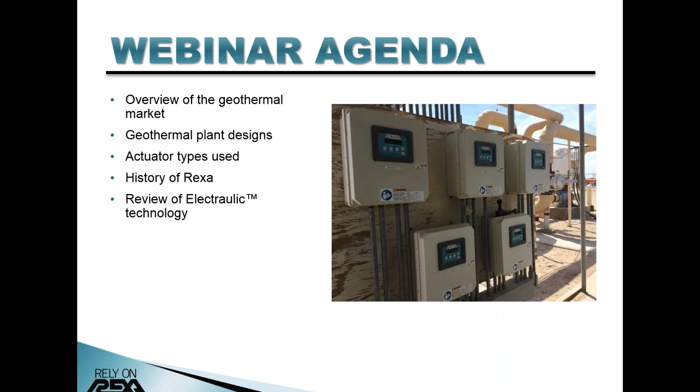A review of our technology. We'll look at the inner workings of the REXA actuator and what makes us the most unique technology on the market.

Some background on governor control valves. Turbine OEMs provide similar control valve equipment and arrangements with new installations. We'll discuss a typical setup with Joe Havorka.

Performance requirements. In order for a plant to operate as efficiently and economically as possible, it's important that governor valves perform to a very high level. We'll talk with Joe on this subject and get his input on performance.

System benefits. When MD&A upgrades older turbine controls with new electronic equipment and REXA actuation, there are many system benefits. Joe will share some of these with us from a plant perspective.

And finally, we'll wrap up the webinar with some takeaways and answer a few questions.

So for those attending and hearing about geothermal power for the first time, let's define just what it is. Geothermal power is a form of clean, renewable energy that taps into underground thermal reservoirs fed by rainwater and snowmelt and heated by the Earth's core.

These reservoirs are essentially limitless, though specific wells can be depleted in time. After the heat energy is used in the plant, the leftover fluids are re-injected back into the underground reservoir to recharge it for future use.

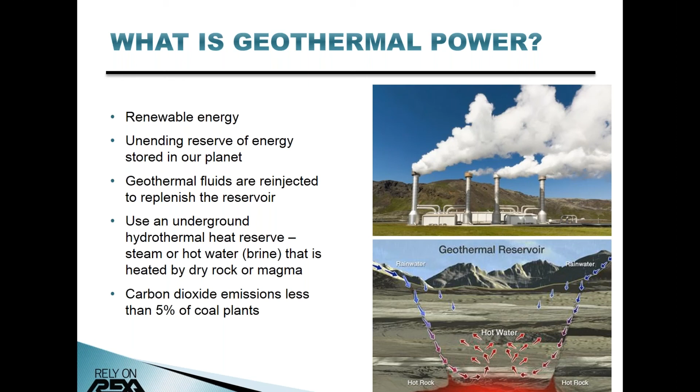Greenhouse gas emissions from the plant are negligible and meet all EPA standards, with CO2 at about 5% of a coal-fired plant.

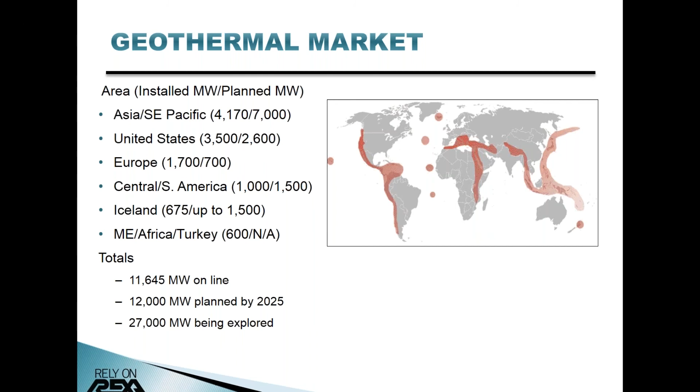Though geothermal power is less than 1% of all power generated worldwide, it is expected to double in the next 7 to 8 years, and then double again based on current exploration levels. It is one of the more expensive renewable energy sources to locate and extract from the ground, but once found, it's non-polluting and can rejuvenate itself. The growth areas are for the most part an expansion of existing plant locations.

Leading the pack is Asia and the Southeast Pacific, primarily Indonesia, Philippines, and New Zealand, more than doubling their current output. The USA growth outlook is about 1/3 of the Southeast Pacific, with most coming from California, Nevada, and Utah.

Central America is next on the list, with focus on Mexico, Costa Rica, and El Salvador. Though not much is published on growth in Iceland, there is the potential to double their current generation.

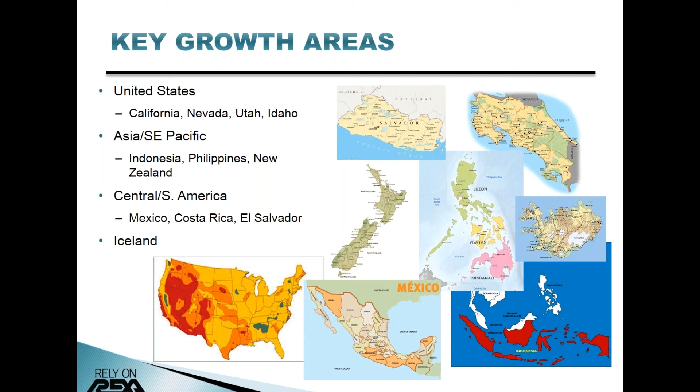So let's talk about plant types. There are 3 basic plant types seen in the field today. The oldest and original design, the dry steam plant, is still very effective today. It uses steam out of the ground and via separators sent directly to the turbine.

The next plant type is a flash design, and the most common. Brine is extracted or pumped from the reservoir under pressure to tanks at a lower pressure inside the plant. Some of the fluid is flashed into steam, which is then cleaned and sent to a turbine. The leftover fluid may be flashed again in a second tank, known as a double flash unit, and sent to the turbine at a lower pressure.

The third and newest technology design is called a binary cycle plant. The steam or brine from the well is piped to a heat exchanger in lieu of the turbine, and heat is transferred to a second medium or binary fluid, usually pentane or butane. This low flash point fluid is then vaporized and sent to the turbine in a closed loop system.

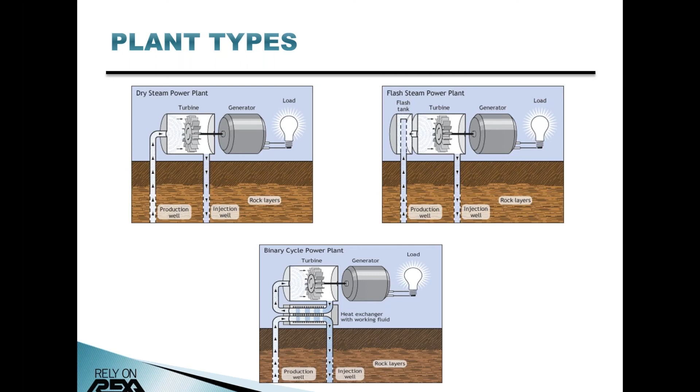Now that we've reviewed the geothermal market and basic plant designs, let's look at the actuator technologies found in these plants. There are 3 types of actuator technologies: pneumatic, electromechanical, and hydraulic. Each uses a different method to develop forces and create motion, all with advantages and disadvantages.

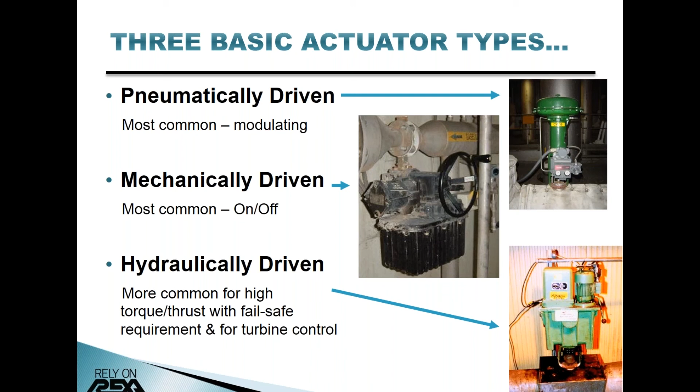First, pneumatic actuators, normally installed in balance of plant equipment, are the most common in modulating applications. Their advantages include low purchase price, and some models are capable of fast stroking speeds. However, there are limitations of using pneumatics. With air as the compressible medium generating force, it is very susceptible to changes in air quality, the major culprit being moisture. And the air needs to build up in order to create motion.

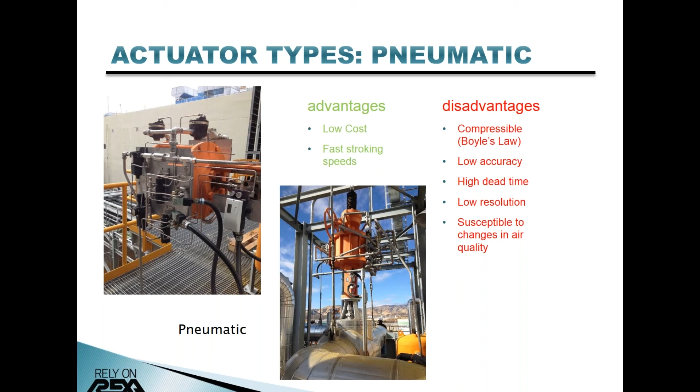The results are losses in resolution, overshoot or undershoot, and increased dead time. Add a smart positioner into the mix, and dead time does improve, but resolution takes a big hit.

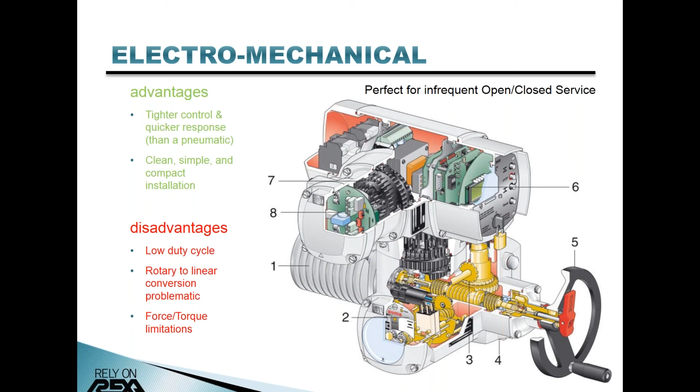Next is electromechanical actuation, most commonly found in on-off type service, which provides tighter control and better frequency response than a pneumatic actuator. However, electromechanical actuators have a limited duty cycle, usually around 25 to 30%, limited force or torque output, and very few fail-safe options. In addition, the mechanisms involved for rotary to linear conversion are troublesome, especially in high thrust applications.

And finally, hydraulics. Using hydraulics is the most common method to operate turbine governor control valves. These systems provide high frequency response, fast speeds with low dead time, high resolution, and fail-safe capabilities, making it ideal for this type of service. These benefits, though, come at a cost. Oil volume is typically very high and requires routine oil maintenance.

Most hydraulic systems are open-looped and have similar types of components that include a reservoir to draw oil from and discharge to, and filters that maintain the hydraulic fluid's optimal properties. Many issues with HPU systems can often originate from breakdown of a hydraulic fluid.

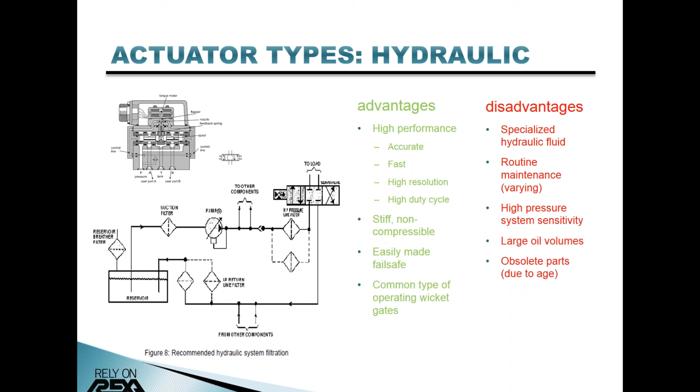There are two areas that are particularly susceptible to contamination: the sump or reservoir and the turbine itself. It's at the sump that hydraulic fluid is exposed to atmosphere, which includes moisture and particulates. And at the dry or flash steam turbine, no matter how much geothermal fluids are separated and cleaned, dissolved minerals are still carried over, contaminating the lube oil. Components like servo valves are very sensitive to changes in hydraulic fluid quality.

Rexa combines the benefits and capabilities of each of the actuator technologies into one: the simplicity of pneumatics, compact installation of electromechanical, and the fast stroking, high resolution, and high duty cycle of hydraulics.

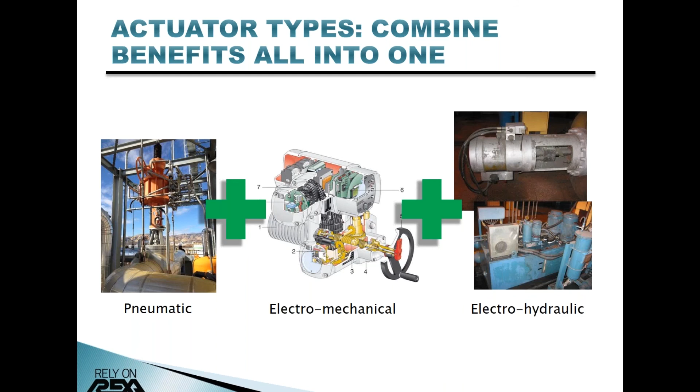Let's talk about a brief history of Rexa. How Rexa came to be was from identifying control issues in a process loop and looking for methods to fix those problems. Valves were often, and still are, blamed for poor control in a process. What if the valves were not the only reason for having control issues?

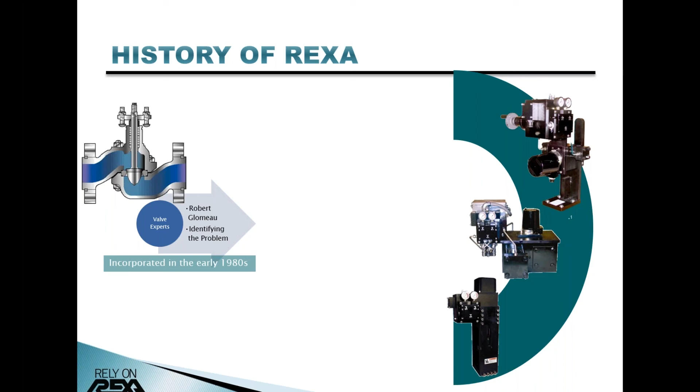Robert Glomeau from Mason-Neilan recognized that other variables were at play and had a passion to come up with a solution. He emphasized it was the final control element, the portion that controls the valves and gates, that was the area needing improvement. So it was in the early 1980s that he set out to develop a technology that had to be accurate, stable, simple, and compact.

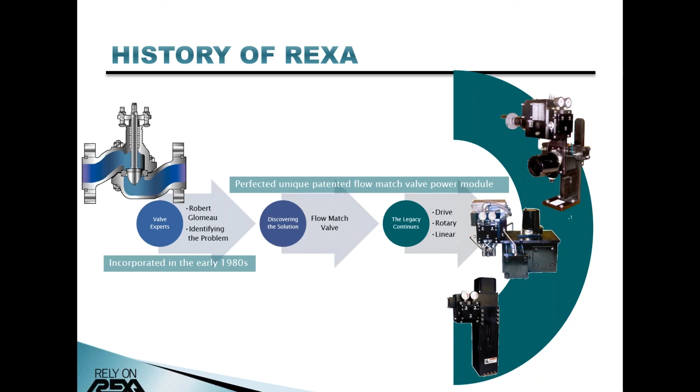The result was the patented flow match valve technology, also considered the heart of the Rexa. From that point, the linear actuator is completed with rotary and drive units to follow. And for those wondering, the name Rexa actually stands for Robert's Expert Actuator.

Let's talk about some benefits of the trademark named Electraulic actuator. To start with, it's a very unique design, unlike anything on the market today. The true closed-loop hydraulic system is hermetically sealed, with oil volumes approximately 95% less than those found in a standard HPU. There are no filters or oil changes required, making it very maintenance-friendly. All models are 100% duty cycle through the use of brushless stepper or servo motors.

These units are high precision and repeatable to 0.05% of span. Our modular design allows for very high thrust and torque output with high-speed fail options. Operating temperature range is from -40 to 250 F without performance degradation, and having passed rigorous testing for the US Navy, Rexa actuators are unmatched when it comes to being rugged and reliable.

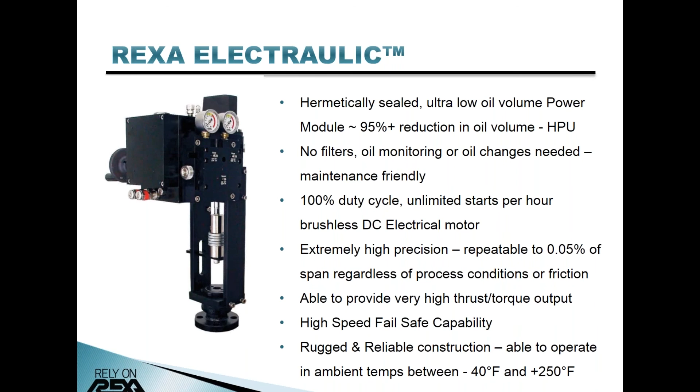The Electraulic technology consists of two primary components, the mechanical subassembly and the electrical subassembly. The mechanical portion is attached to the driven device, which in this case would be a governor control valve. The electrical subassembly is basically the positioner for the actuator. This is where the main power supply and control signal are routed, and the origination of the 4 to 20 milliamp position feedback for connection to the DCS or other control system.

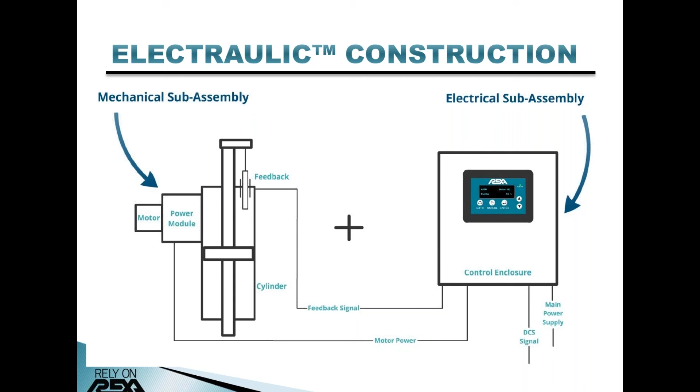We separate the electric and mechanical assemblies for ease of access and operation. There are many severe applications, for example in mining and desert environments, where onboard electronics simply would not survive. The control box can be mounted in a convenient location to the valve, or up to 700 feet away.

Let's take a closer look at the Rexa hydraulic circuit. This is the real area of differentiation with our technology in comparison to HPU-based electrohydraulic systems. The centerpiece of the electrohydraulic circuit is our bidirectional gear pump, which is coupled to the Rexa brushless motor. The gear pump works in conjunction with the flow match valve, designated as FMV1 and FMV2 on the schematic. It is important to note, from a size perspective, the flow match valve and the gear pump can each be held in the palm of your hand.

During operation, when the actuator is at the desired position, spring-loaded ball check valves are locked in place to prevent the flow of oil through the flow match valve. But when there's a signal change, the motor activates, turning the bidirectional gear pump, which instantaneously builds pressure, allowing the ball checks to open. The oil is then transferred through the flow match valve from one side of the cylinder to the other. Once the actuator has reached its desired set point, the motor stops and the ball checks are seated, stopping the flow of oil through the system.

The cylinders that we use are dual rod, so the oil volume exiting one side of the cylinder is equal to the volume entering the other side. The design eliminates both the requirement for an external reservoir and the need for continuously circulating oil through the system.

This also leads us to another significant benefit of our technology: greatly reduced oil volumes. A small Rexa system, something that would require a small cylinder for lower thrust output and shorter stroke length, like a desuperheater spray valve application, may only have a total of 8 to 10 ounces of oil in the entire hydraulic circuit, including cylinder.

A larger Rexa circuit, one with higher thrust or output and longer stroke requirements, like one driving a governor control valve, may have as much as 1 to 2 gallons of oil total in the system. But this is a far cry from typical geothermal control oil systems, which could have 500 to 1,000 gallons of oil in the entire system.

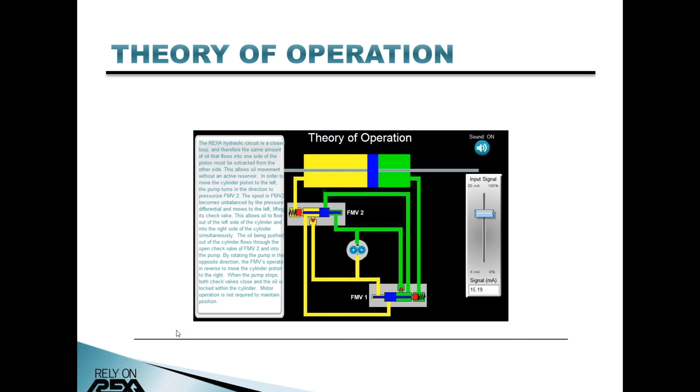Now that you're all experts on how the Rexa actuator works, let's move into some background information on turbine control valves. This portion of the webinar will focus primarily on dry and flash steam plants, which stand to benefit the most from MD&A and Rexa upgrades.

The majority of OEMs, including GE, Mitsubishi, Fuji, and Ormat, to name a few, provide hydraulic actuated valves with the turbine. A 3-valve system is shown on this slide.

Their primary function in life is to modulate steam into the turbine for startup, shutdown, and to maintain a constant RPM during normal operation. On the safety side, these valves are also required to trip closed on loss of load, although some plants need trip to position to maintain a house load level of power for plant use. This also allows a hot start in lieu of a warm or cold start with the turbine completely stopped.

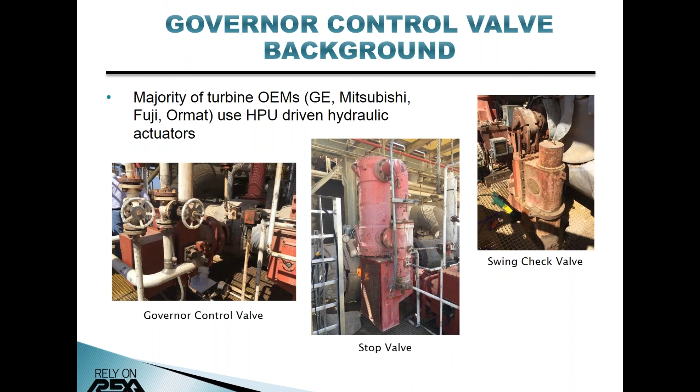Shown here are a Rexa/MD&A improved governor control valve and stop check valve. Governor control valves are almost always butterflies, usually double or triple offset.

Notice the original spring can behind the valve. Since the valve with through shaft was not replaced, we were able to leave the spring assembly in place and use the fail-safe feature with our new actuator. The stop valve is normally a swing check style as depicted, fitted with a Rexa fail-closed spring return actuator.

So question for you, Joe. When customers come to you for upgraded governor control like the one seen here, what are their usual complaints?

Well, primarily, Rich, the concerns that our customers have when they're looking to upgrade tend to be in 3 primary areas. One is maintainability, component obsolescence, and also lack of OEM support.

Primarily the maintainability and obsolescence, in a way, tend to go together, but depending on what you're starting with regard to a control system, you can have mechanical controls originally, or analog electronic controls, or digital electronic controls. Typically the control systems will fall into one of those 3 categories.

And again, depending on OEM support and parts availability, you can be looking at some sizable downtime on a unit if you run into problems. So those are the 3 things that we see as being drivers for looking into a controls upgrade.

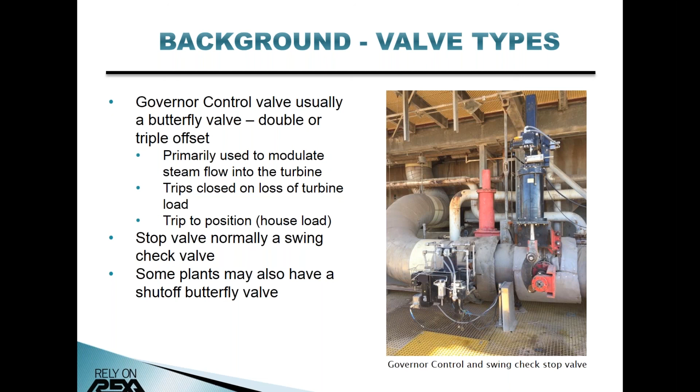Well, very good. Is improvement of positioning accuracy something they mention?

Oh, absolutely. In a lot of cases, especially with the older mechanical systems, we get into a situation where units degrade over time, and control over valves, especially on the geothermal side, where we're looking at butterfly valves controlling steam flow, that control makes it difficult to even synchronize the unit sometimes.

Depending on what the prime mover is, as far as that control system is concerned, you end up having issues with servo motors or mechanical hydraulic positioning systems for various reasons that can relate to positioning accuracy degradation and all the associated problems. Controlling load is always an issue. Having the unit be able to respond accurately to dispatching changes is an issue. All of that goes back to the maintainability of the system and the ability to accurately control that valve position.

Well, thanks for the explanation. I appreciate that.

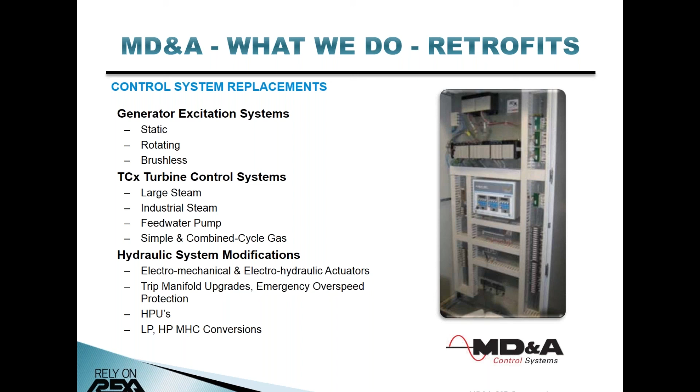Now, for better understanding on the valve arrangement we're talking about, this next slide is a snapshot of a control room panel in El Salvador showing a double pressure dry steam system. Medium pressure, by the way, is at 57 psig, or 4 kilograms per centimeter squared, and low pressure is at 10 psig, or 0.7 kilograms per centimeter squared.

Note the configuration of the left and right side turbine valves. Closest to the turbine are the modulating control valves, then the check valves, and further upstream, the shutoff valves.

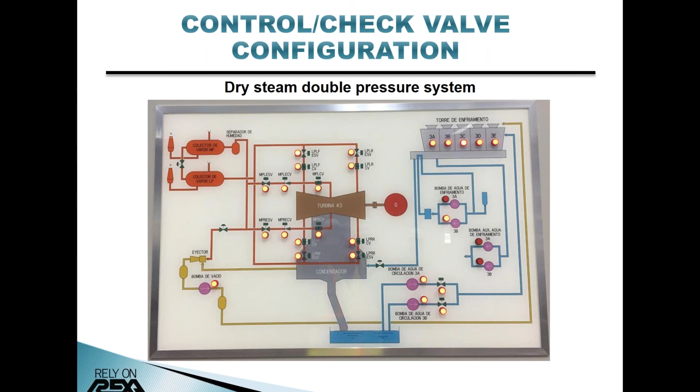With deadband set at 0.1%, which leads to a resolution of less than 0.1%, and a linearity capability of less than 0.05%, the Rexa Xpac is the only actuator product line truly capable of matching the potential of modern control systems. Joe, another question. Do customers have challenges in this area with traditional HPU-driven systems?

Well, yeah, I mean, if you look at HPU driven systems, or hydraulics in general, there's pretty much two categories. One is a high pressure system where you're looking at hydraulic oil that's in the range of 1,500 to 2,000 PSI, and is used as a standalone to other hydraulic systems in order to position the valves.

In addition to that, there's also a low pressure system, or what we consider a low pressure system, where the turbine lube oil, or the same volume or the same reservoir as the turbine lube oil, is used to provide pressure that's around 300 pounds to move the valve actuation.

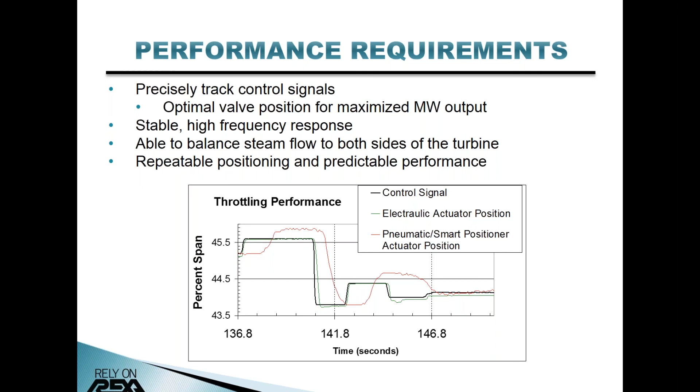I'm sure a few people attending this webinar are thinking that a Rexa actuator upgrade might solve many of their control problems, but additional work may be needed. This next slide is of a turbine you upgraded with current day electronics. Can you tell us about it?

Yeah, sure can. This upgrade was from a mechanical hydraulic control system to a completely electronic control system, including Rexa actuation on a rack and pinion and cam operated set of control valves. This is sort of a medium pressure steam turbine in an industrial plant, not dissimilar to what you might see in a geothermal plant. We took all of the mechanical, hydraulic, speed sensing, flyball governor, all the actuation on the rack and pinion, and removed everything, and supplied an electronic governor, speed pickups for sensing the turbine speed, replaced the flyball governor with a tooth wheel. We replaced all of the trip mechanism assembly with a 2 out of 3 testable trip logic and hydraulic valve going to the existing stop valve, and coupled all that with the Rexa actuation on the camshaft.

Now, when it comes to stroke speeds of the actuators we're talking about, it's very important when controlling turbine RPM and or reacting to a load shed. Joe, another question: can you comment on stroke and trip speeds for the control and stop valves shown in this slide?

Sure. Not only for the valves shown in the slides here, but anytime we do an actuator replacement on any turbine generator set, the number one concern is safety with regard to the equipment. We always want to be able to control in an emergency situation to prevent overspeed on the unit, as well as controlling during normal operating functions. When we look at a system for retrofit, one of the first things we do is assess the existing hydraulics and make sure that when we're replacing those hydraulic components, we're going to meet or exceed the types of response that the OEM intended. So we're not going to, in most cases, drastically change the operation of the turbine. The turbine is what it is, and the OEM intended for it to be operated a certain way, and normally it's not a good idea to go changing those kinds of things unless you're doing steam path upgrades, et cetera, in conjunction.

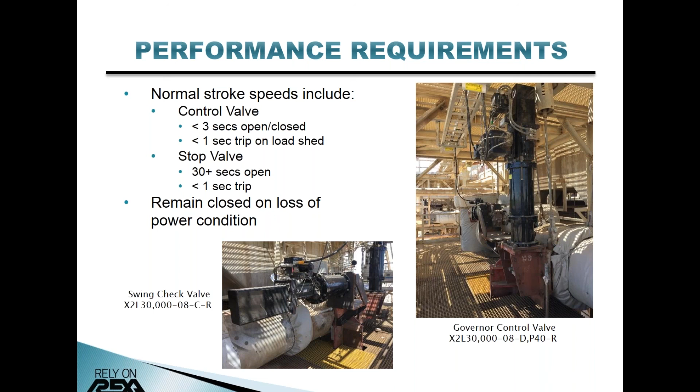I guess that answers the question? Yeah, it certainly does. Thanks very much for that, Joe. That was great, appreciate it.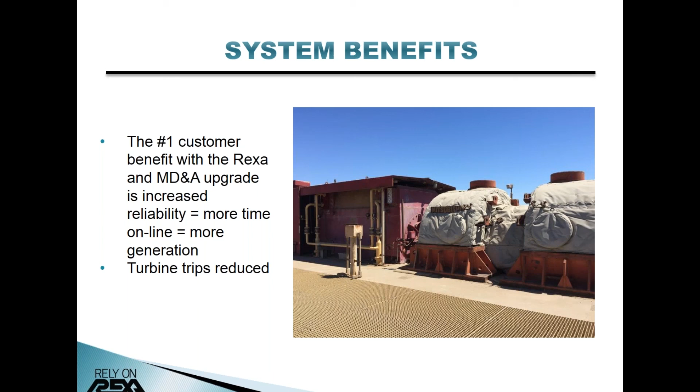All right, so let's switch gears and talk about system benefits and plant benefits. Of course, the biggest value provided to the customer with the Rexa and MD&A upgrade is increased reliability and generation. Unexpected turbine trips due to control valve failures become a thing of the past. More time on the grid equates to more megawatt hours.

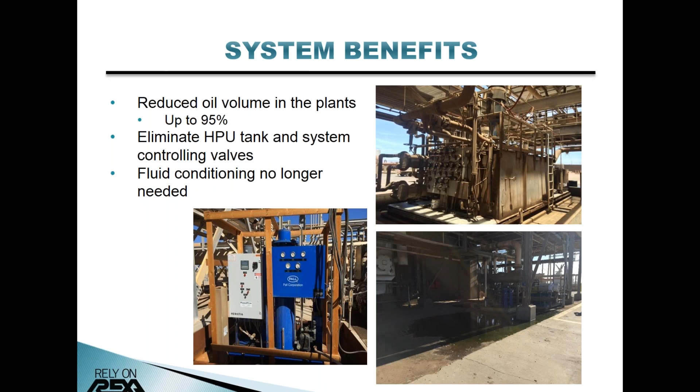When the old hydraulic actuators, plugged up servo valves, and constantly running pumps are removed, the maintenance staff can actually focus on maintenance instead of troubleshooting hydraulic systems. As the equipment ages, the frequency of maintenance increases. Parts coming from all over the world can have lead times longer than a year and cost as much as a new Lexus. Often they are found to be obsolete, leaving plant staff the only option of making them locally.

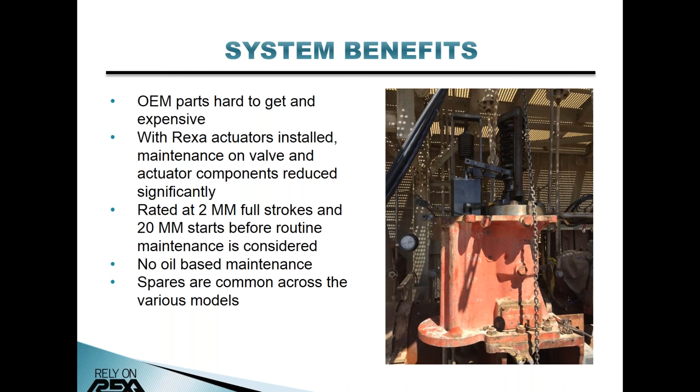With Rexa installed equipment, maintenance is greatly reduced. Actuators are rated at 2 million full strokes and 20 million starts before any normal PM is needed. Real time, this equates to 7 to 8 years of operation. Depending upon the service conditions and duty cycle, that time is usually extended. Since the actuators are sealed and the oil does not get contaminated, no oil-based maintenance is required. Many spare parts are common across the various models.

The first takeaway is to precisely position governor control valves. Rexa's advanced CPU-based electronic control, coupled with a patented flow match valve system, allows control valves to track signal changes like no other actuator. A deadband adjustment of 0.05% leads to both a resolution and a repeatability of less than 0.1%, and allows positioning to 1/1000th of an inch.

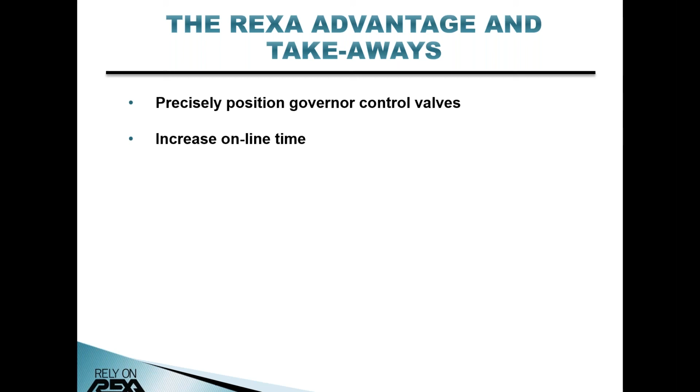Increased online time. The hermetically sealed power module does not allow the intrusion of contaminants, often the demise of HPU-driven systems and erratic valve behavior. This provides operators the opportunity to maximize turbine output without the concern of unexpected trip events.

Trip to position for house load. Some plants require the turbine to stay running at a slower speed on load shed to maintain power inside the plant. Using one of Rexa's fail-safe options, either a spring or nitrogen charge accumulator system, trip speeds of less than 1 second are not uncommon. By nature of the internal hydraulic circuit design, the actuator is capable of stopping at position with no overshoot.

Dramatically reduced maintenance. After years of service, the oil inside the Rexa power module is as clean as the day it was built. The oil does not need to be changed or cleaned. Not often tracked, the time and money spent on these tasks with HPU-driven systems can be significant. Often, more time is spent troubleshooting problems than fixing them, not to mention the mess of draining hydraulic fluid from damaged components.

Eliminate servo and proportional valve headaches. Caused by oil contamination in the sump and impurities from the turbine, servo and proportional valves are the weak link in the HPU chain. With Rexa actuation, there are many system benefits.